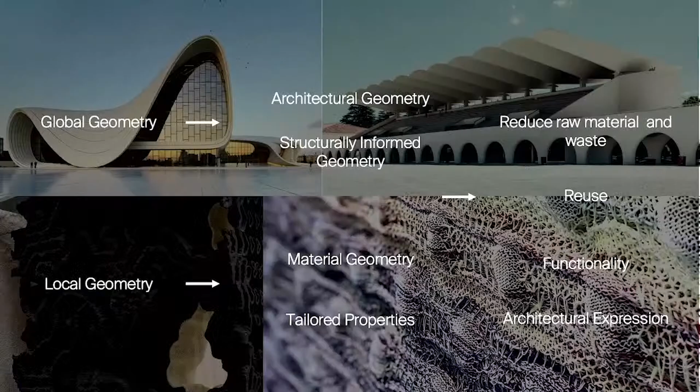More specifically, if I think of those in terms of geometry, we could categorize them into one, the global geometry type of scale, where we think of architectural geometry or structurally informed geometry, and this comes very much from the heritage of having been here in the BRG, as some might think I still am. They are not mutually exclusive, and sometimes they actually work quite well together.

But it's not only always about the global geometry, where we talk about these units, but actually also a little bit of a deep dive into local geometry. And that local geometry could very well be understood in terms of material geometry, so specifically where we place that material within a structure, and having those tailored material properties.

So really being able to say, I would like there to be this type of material here, and I would like it to perform this way, or vice versa if the material wants to do that.

What these types of approaches, both at those double scales, can allow us is to look into this reduction of raw material use, reuse, functionality, and architectural expression generally, so that we can go across all of those scales. And if we keep that on one side, what I'm really trying to do most of the time is couple the way we design, build, and usually that's very specific, and fabricate, so that it can enable us to achieve these goals.

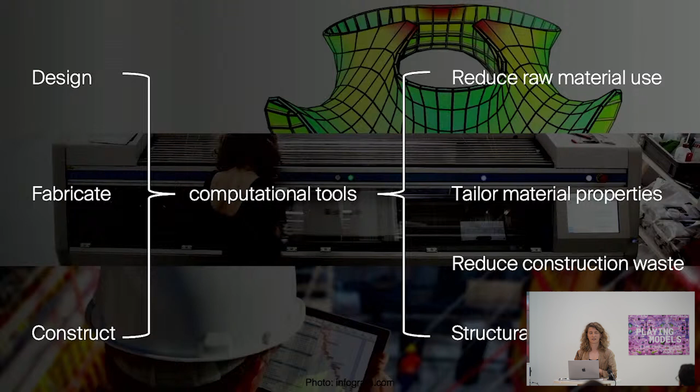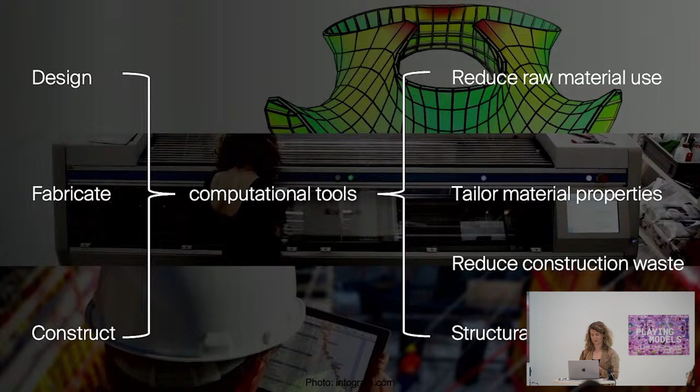And those enablers are actually computational tools. I put fabrication very specifically in between designing and constructing, or designing and building, because most of the work that I do is linked to fabrication, so I would like it to be there explicitly. I don't talk maybe as explicitly about design, but you'll see how that gets informed through these.

To get quite to the point in the deep dive, in that sense, I really work on how we could do better with the materials that we have, so that we use less materials.

In the PhD that was developed within this building, I looked at how we could build complex concrete structures in a more effective way, because if we have these kind of concrete structures that are thin, filigree, span large spaces, have doubly curved geometries, and so on, as you might see in this image, we can reduce that material use, but what we usually have is a problem in how we build them.

This image is by no means a sort of criticism to the master builders, Felix Candela or Pier Luigi Nervi. It's actually kind of an homage to say that these people at that time were also looking into material efficiency and how we might rationalize geometry and build that and come up with systems to build. So if anything, it's taking inspiration from that, and trying to translate it to the modern day.

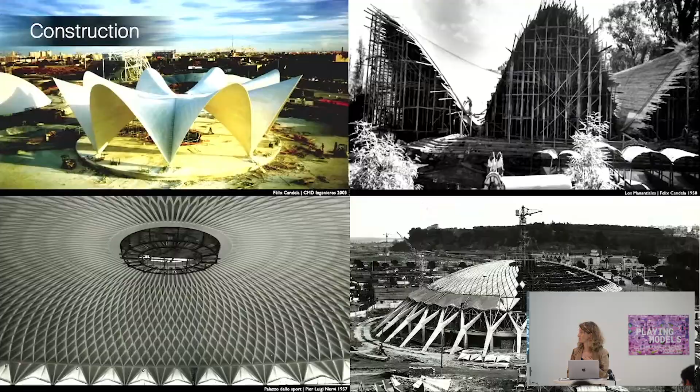In that context, the system that I usually talk about is a lightweight formwork system made with knitted textiles specifically. Now, textiles are used for formwork more often, and they have been explored throughout the past 100 years or so. What's special about what I do is the knitting side of things in that sense.

The reasoning behind that is that they're fast to produce. They can allow us to reduce this waste and be used with minimal intrusion. I'll give you a few examples of that throughout the presentation.

The idea behind it is that somehow if we move away from a traditional formwork system, so one that we're used to where you have timber forms or milled EPS forms or whatnot, into one that uses a membrane as a forming system, we have an avenue to use less material, both in the structure and in the building thereof.

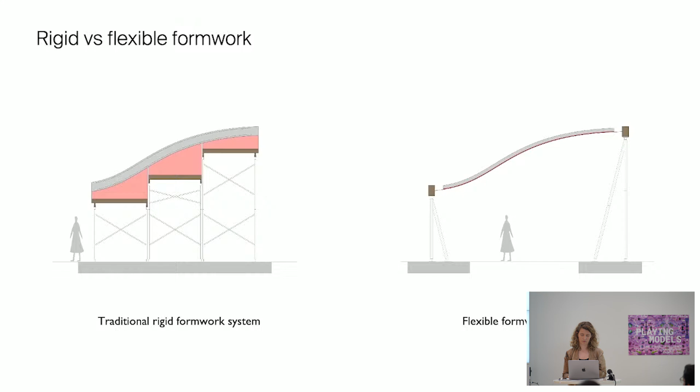How something like this works is we start with a design, hopefully a structurally informed design, one that uses less material.

For that design, you produce a fitting knitted textile using existing machines, so it's a robot of a different sort. That textile is then taken to site and tensioned into a rig, and that tensioning can be done in any number of ways. You could do this with an exterior frame, as you see here, with cables, with splines.

With inflatables, however you see fit, or however the structure deems fit, and then it's coated with a thin coating that gives it an initial rigidity to make the formwork. This step is quite important because for all of their advantages, knitted textiles are very soft. So if you were to attempt casting anything into them, they'll deform quite drastically, and that doesn't really bode well with us wanting to get the structure that we want out of it. So keep that in mind.

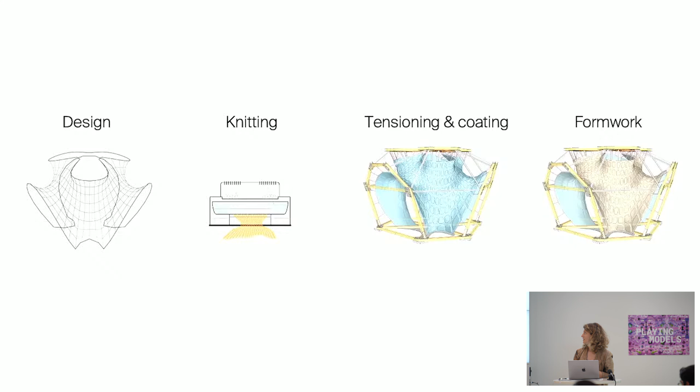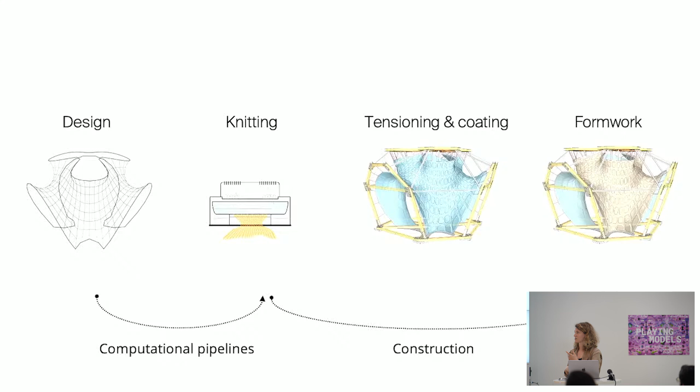There are two challenges in this. The first challenge is, if we do have a design, how do we get to the fabricated textile for it? Those can be addressed through computational pipelines. The second challenge is, if we do have that textile somehow magically fabricated - and it's not so magical actually, you'll see - how do we use it to construct things, to build things? Throughout the examples I'm giving you today, I'd like to show those two processes, starting first with the construction side of things, very briefly, very fast.

The first time we tested this out at the large scale was during the Knit Candela project in 2018. We give these names to projects because they're very much homages to the famous shell builders in question - in this case, Felix Candela - where we reinterpreted that geometry of the hypar into one that is fully doubly curved and explored how that concrete structure could be built using a textile.

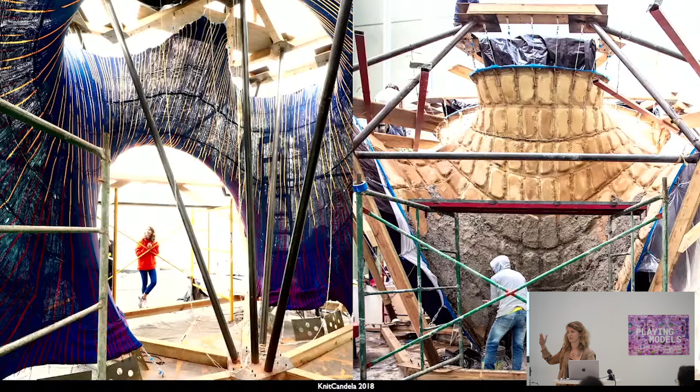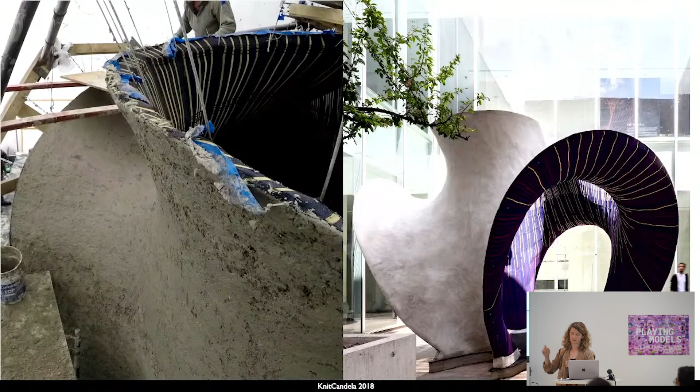What you'll see - I'm not going into details about it, it's a project I've shown a couple of times and I hope it is one to show how the system works - is that kind of textile that gets manufactured is tensioned in a rig. It's coated with a cement paste coating on one side, and then concrete is applied in a rather traditional, manual way, as you can see in that image. At the end of it, when the concrete hardens, you can take away the frame.

You end up with a structure that looks a little bit like this, that has this play between the hard concrete exterior and the soft textile interior. And that's just a video of it in that sense.

Why this project is particularly important, or a pivotal point, is because it looks at the construction of the concrete side of things - how we can have such a lightweight system carry a heavy concrete load, or whatever other molding material you might want to mold. And on the other hand, because it actually really looks at how we might scale those textiles and have them very specific for the purpose that we need.

Some of the takeaways are that the textile formwork, the 50 square meters including cables that were needed, but excluding the outer frame, cost about 2,500 euros - or 2,500 dollars, whatever translates. They weighed about 25 kilos, and the cable net weighed another 30, so in the end, 55 kilos carried 5 tons of concrete.

Here is where it gets really interesting, at least for now: it took 36 hours of machining time to produce those 50 square meters of doubly curved surfaces, and it would usually take about 750 hours to mill 50 square meters of a comparable doubly curved surface. It took 14 weeks from design to the structure standing there, and that says something about the kind of activity that can be achieved if we have the types of systems that enable that.

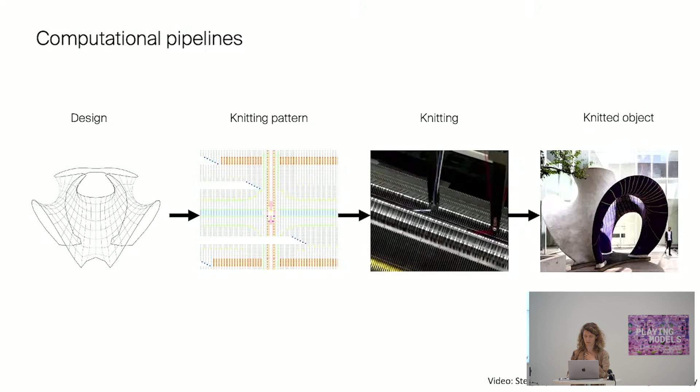Now, if we want to do this at a larger scale, what we need are these kinds of computational pipelines that translate that design into an instruction for the machine automatically. That's what enabled this kind of project, or the 2 years of development beforehand.

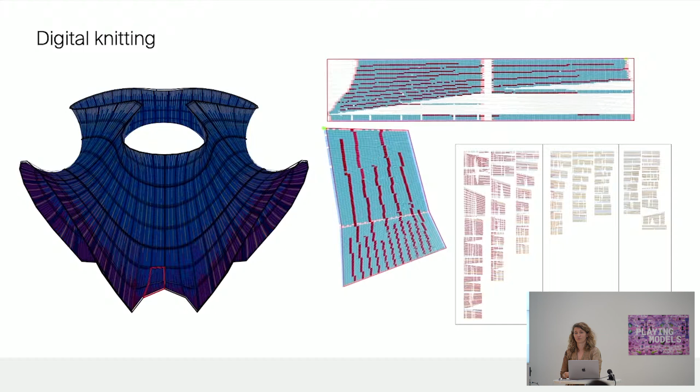What this really does is a 3D remeshing of the object or geometry we want, into a topology that can then be represented as a 2D grid. That 2D grid can be represented as a pixel grid that can then be given to the machine. So there's this direct relationship between a 3D object and a 2D representation of that object, meaning you actually produce something 2D that is 3D.

That's what the machine looks like in general. It's kind of just a plotter that goes line by line and adds material where you've told it to add material.

I'm showing it because these types of developments are not only interesting for us, but for machine manufacturers as well, specifically because it gives them an entry into a different field or sector they're not actually active in. So it's nice when you also make other manufacturers happy.

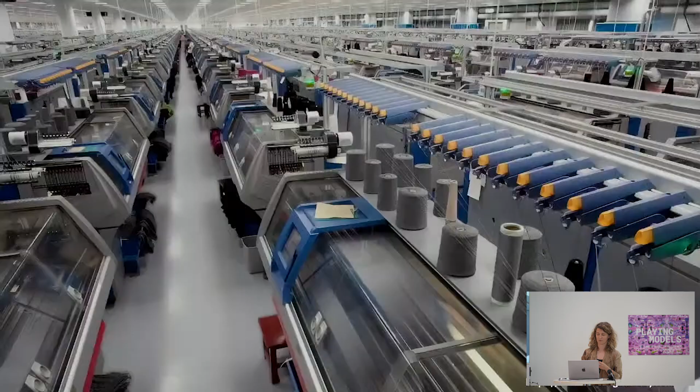Most of the time it's not only about making them happy. Though we show these kinds of machines in isolation, because in a research context it's usually just one, the truth is there are many machines like this all over the world. There are hundreds in factories churning away socks or whatever else they're doing for us. So if we can make those types of instructions, we can send them very lightly wherever and have things produced locally very easily, tapping into this type of power of production that already exists there.

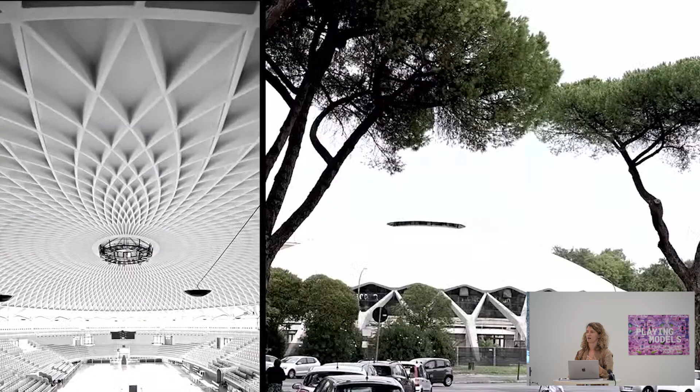The next project I wanted to show you was one we finished in 2022. It started out as just an ETH project, then I moved to Delft and it turned into a cross-country collaboration. Let's say it's an evolution of the first one that looks again into the formwork system itself, but also into how we might bring it closer to something that industry might understand as implementable a little sooner.

In this case, as the name suggests, it was called Knit Nervi, inspired by Pierluigi Nervi and the Palazzetto dello Sport. The pavilion was built at the Maxxi Museum in Rome, just a couple hundred meters down the street. What you'll see here is this kind of diagrid of ribs, a ribbed shell structure, that isn't always easy to build, so we looked into how this might be built.

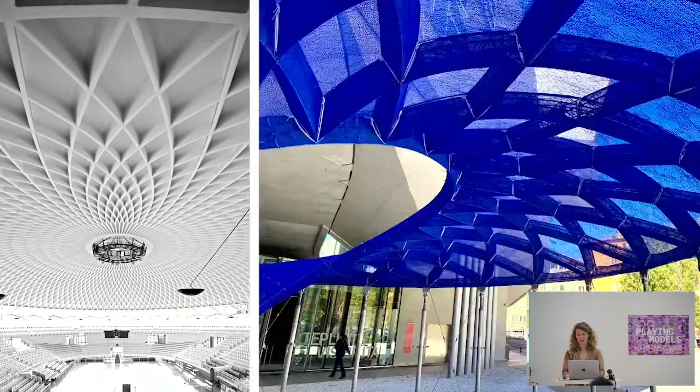You'll see that interpretation of this geometry in the funnel shell shown here. And because, of course, we had Lotte working on it—Lotte is a PhD student still at the BRG, but comes from Stuttgart—you might see this nice little droplet that's evocative of these kinds of Frei Otto geometries as well.

What you'll see here in the geometries that we try to make this kind of diagrid structure, it looks a little bit more recognizable probably to industry, and it includes reinforcement. This is what it looks like from above in the end, so you'll see the kind of diagrid. It looks small, mostly because in any photo that we take, it's either dwarfed by the museum, that is huge, or it seems somewhere placed alone in space.

The truth is, for context, this is about 2 times the size of the previous structure I showed you. So this is 9 meters in diameter and 120 square meters of textile, right? So we have an order of magnitude of scale in that sense. This type of process also started with a form-finding exercise in the beginning, to get to the geometry of the shell.

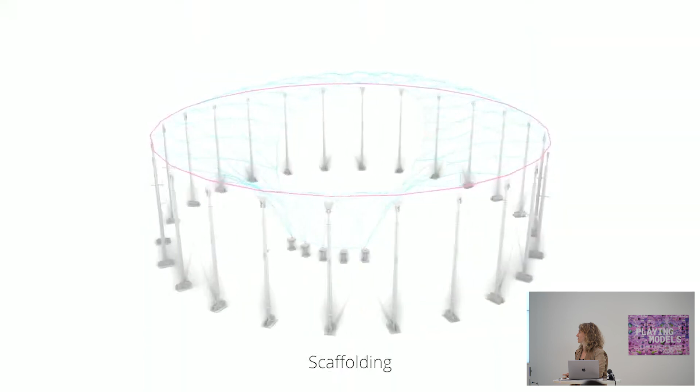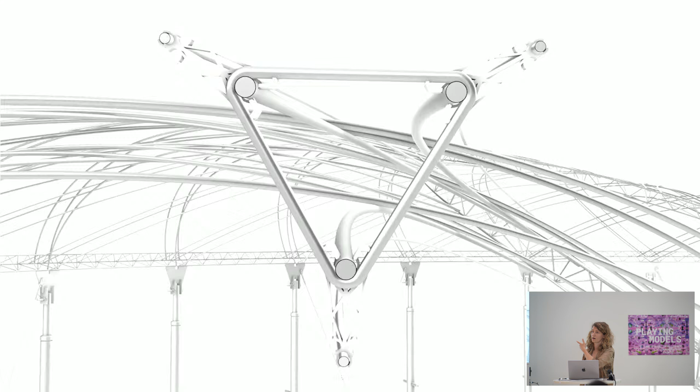You'll see how this is reinterpreted by moving the supports up and down. In this case, what we also wanted to do is make sure that there is even less waste or support structure that's not used subsequently. So in this case, we took the rebars that would be the rebars in concrete. They're a bending active grid shell, and they would become part of the structure, but they are the ones in this case supporting the textile with some 3D printed nodes from it.

This is what it looks like during construction, just so it gives you a little bit of an idea of how that bending active grid shell looks like as a structure on its own, and how this gets covered with the textile in the end that would become the formwork for concrete.

So if we explode those kind of geometries, it looks a little bit like this. There's some standard scaffolding support, and that's the only part that's not used within the structure eventually, but the standard scaffolding support can be taken away and used anywhere else. So there's really very little waste there.

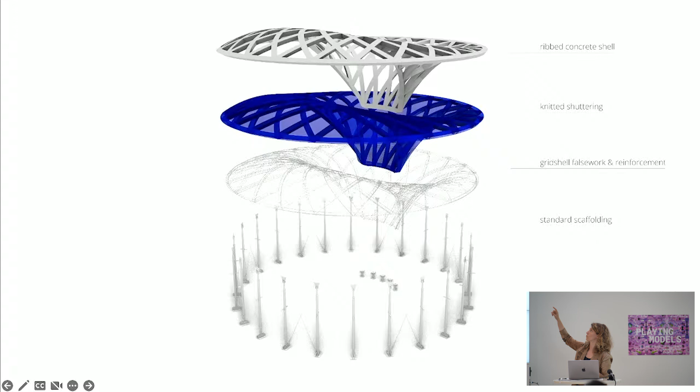There's the grid shell falsework that becomes reinforcement within the structure if it were to be cast, the knitted shuttering, and what would have been the ribbed concrete shell that results from it. Now, full disclosure, if it wasn't clear from the images already, we did not cast this.

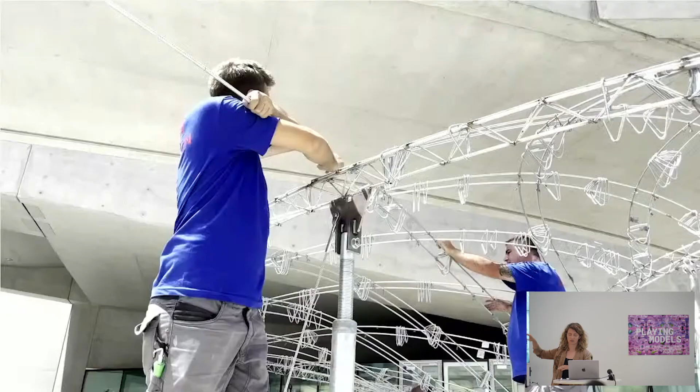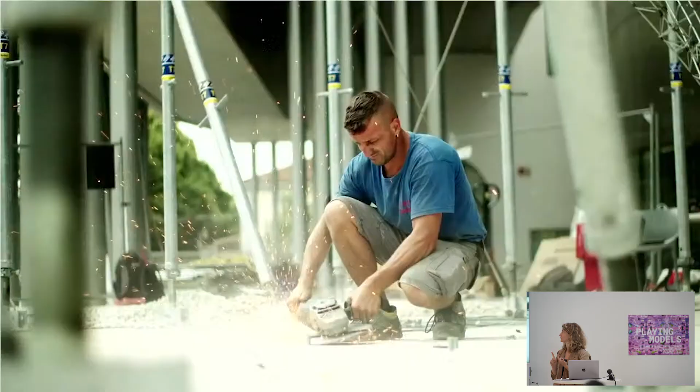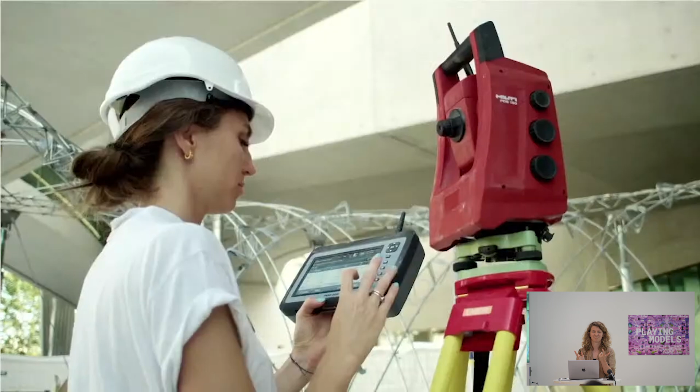There are 2 reasons for that. And while you see how the first part was being built up in rather traditional ways, the reason for not casting that was, for one thing, we did it before, so we could reasonably assume that we've shown that you can use it, although you never do until you do. Secondly, it was a temporary exhibition, so if we were going to make a point about being sustainable about concrete use and then make a structure for 5 months and demolish it, we thought maybe the message is not completely there.

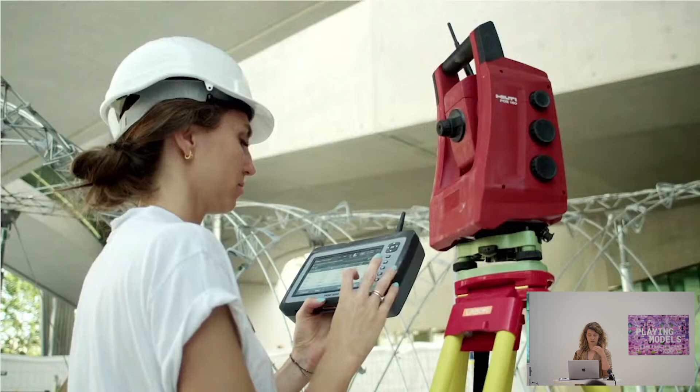But third of all, it was in a museum, and the visitors to the museum were not necessarily people from the construction sector or architecture, so it gave us an opportunity to look at how we might offer the visitors an X-ray through the structure or an understanding of what a structure is built up like in general terms. And think of the whole build-up in a fully deconstructible way, so that it's modular and could be constructed and deconstructed instead of torn down.

What we did is we built first the grid shell. So you'll see it ends up looking like this. We measured everything about it, and then decided to start the production of the textile after the grid shell was built, so that you would create an actual tailored fitting textile for it.

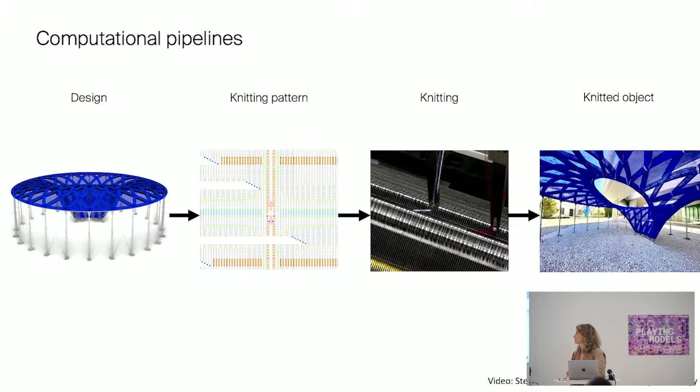Now we're talking about 120 square meters, not 50, so we're looking into a little bit of a different scale in terms of computing power or how you generate these patterns. And we also started looking into how we might address very specific material properties locally. Until now I've been talking about the global geometry of it, but in this project, local geometry starts playing a role in the same way through a very specific tailored materiality locally.

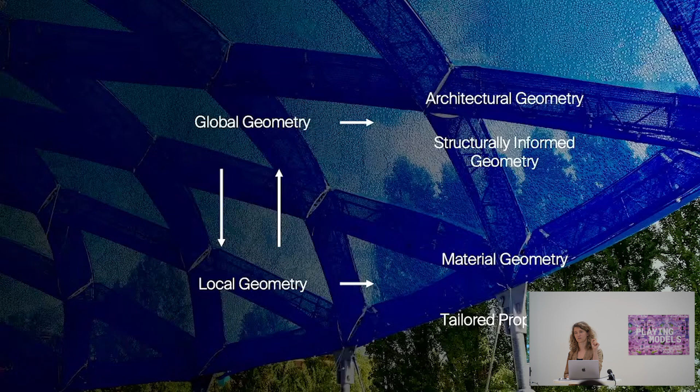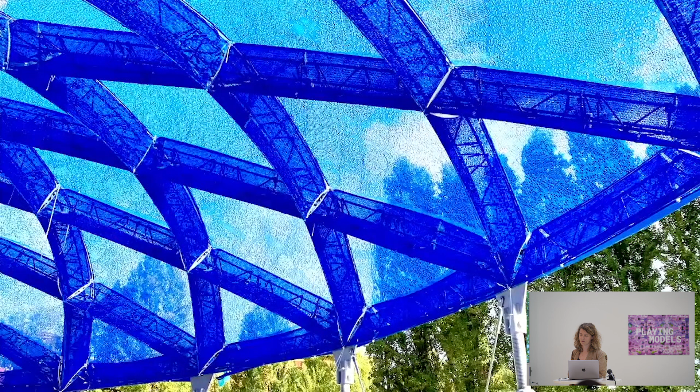So what you'll see in the transparencies—and this will come, they're a little bit difficult to photograph—is that in the transparent parts between the diagrid, there's a gradient for each one. You have graded material properties that are fully controlled during fabrication, but also fully controlled during that generation process. To do this means you need to generate your patterns or pixels in a very precise manner, otherwise it becomes a lot more difficult to control.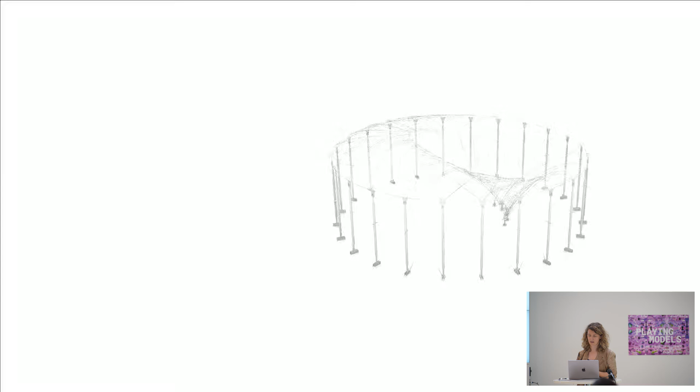So in terms of computational pipelines, that meant a development. In this case, we didn't have just 4 pieces as in the previous one, but actually 72 pieces that needed to be made, so you need to generate quite a lot of data and make sure you can control that. Just to give you a quick idea, we started with a density distribution for how we wanted the material to be.

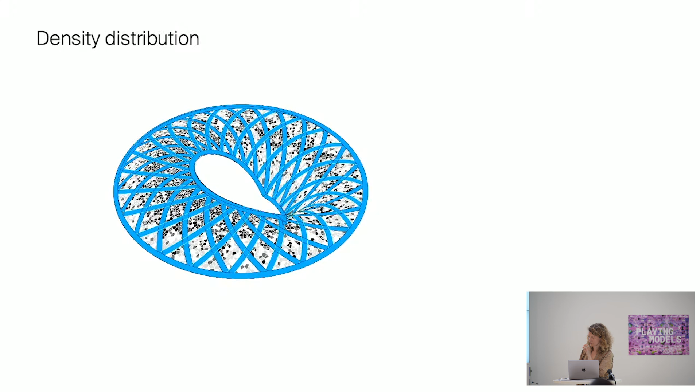The diagrid itself doesn't have density variation because that represents the concrete. For each one of those pieces, it would generate that 3D topology of points that represents a 2D grid. In this case, it's about 30,000 generated points to get to one of these. Each one understands its relationship to the structure in space, and understands what it's supposed to be as a function in the final piece.

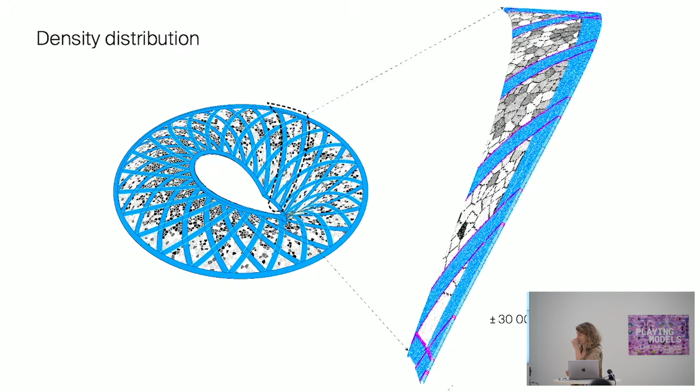For example, the magenta bits know they need to be a channel, and the others know they need to have a particular density. The 2D representation would look something like this, but there's another catch: this type of grid means each pixel is actually a 4x4 grid, so it needs post-processing to transform those into actual instructions for the machine. They were generated on a 4x4 grid instead of very specifically on a 2mm by 2mm grid.

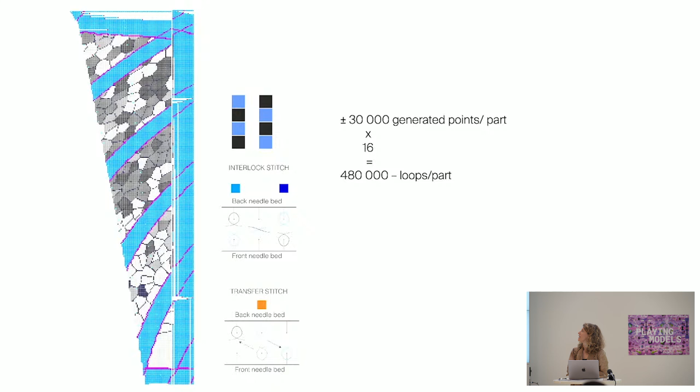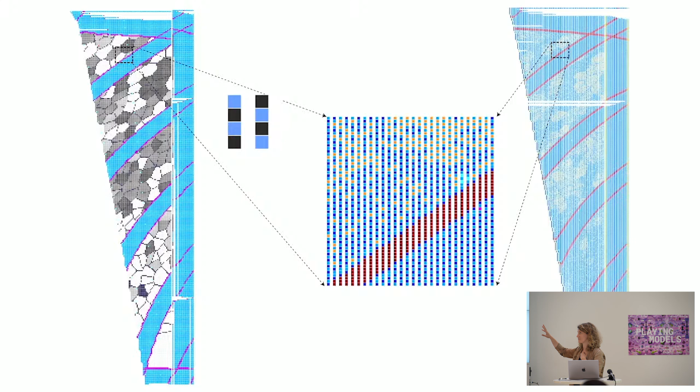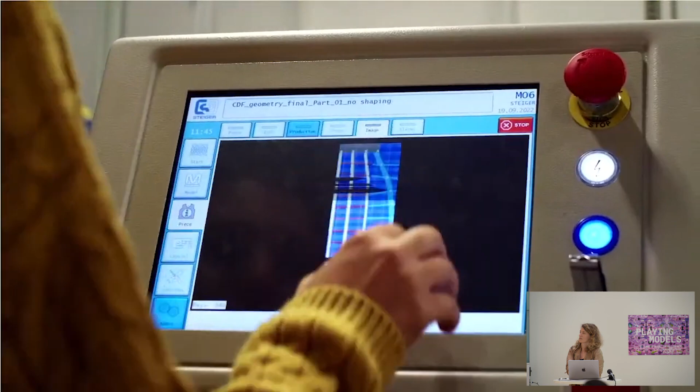That looks a little bit like this. I'll go through it quickly, but it's this kind of post-processing of a pixel into extra pixels that really decides these types of functionality within the final product. After all the different steps, you get an image like this that can actually be fed to the machine to create all the different densities within the final geometry. You'll see again the machine producing these kinds of textiles.

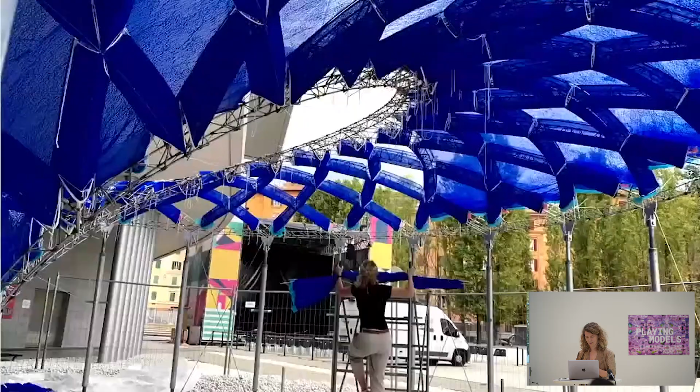You'll see all the pieces, and the classic approach—we put it in one bag and took it to site because it's lightweight and easy to transport. But again, we could just send the instructions. This time around, you don't necessarily need a qualified team of builders to put things up, but rather an unskilled worker who can assemble these things, sometimes taking a little bit more time than they thought. So this is what it ended up looking like in the end.

A few views from the inside, and here I think it's a little bit more clear how you can see these kinds of transparencies or graded material properties that can be done with such pipelines. Again, that project looks at both efficient deployable flexible formworks on one hand, and also graded material properties and the computational fabrication pipelines needed for it. So it's really across different topics at different scales.

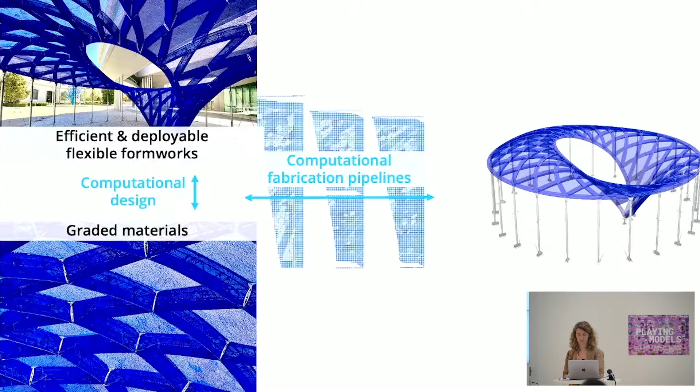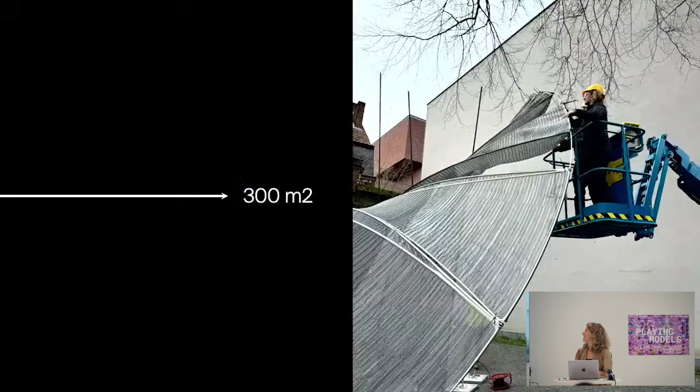If we started with 50 square meters and the second project ended up with 120 square meters—this was 2018, this is 2022—it turns out that roughly every 2 to 3 years, I like to double the amount of textile that we make, and I like to pretend that I'm a construction worker. So this year, we doubled that yet again.

So we went to 300 square meters of textile, and being construction workers, we built a pavilion for Bruges, for the Bruges Triennale. It's called Common Thread. We've done this together with Soil and Summum Engineering. This time it has nothing to do with concrete or things like this—it's purely looking into how we can apply these techniques and how we can scale them up in a few ways.

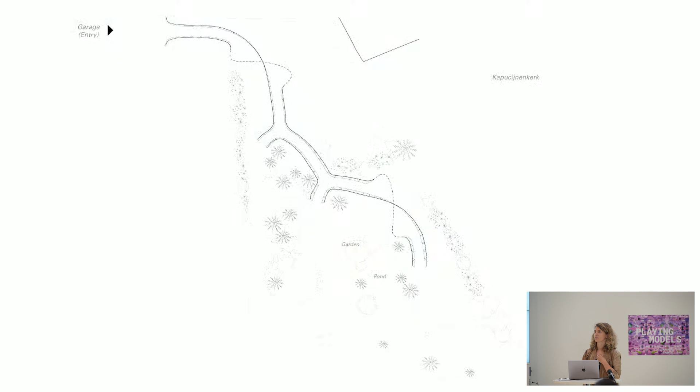For the Triennale, the theme is spaces of possibilities. Since Bruges is kind of seen as an open-air museum, they're looking at spaces that are not usually visited and are not accessed, and how we might bring new life or new use into these spaces.

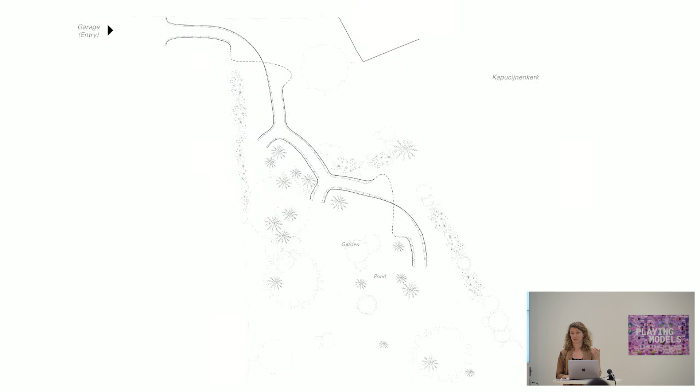It's very difficult to see here, but it's just a structure within a large courtyard that's otherwise never really used, but beautiful. It's inconspicuous, so you get there through a garage door that you may or may not find, and it might just give you this kind of wormhole idea telling you, hey, come in.

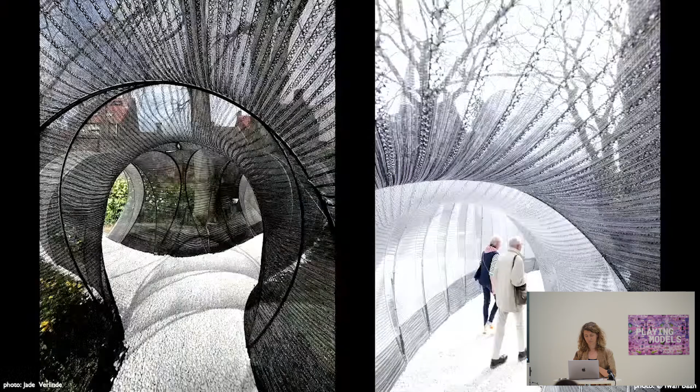And if you do, you go down the rabbit hole through this simple sort of tunnel, but that flips you inside out in moments and creates this kind of space within the courtyard, trying to thread a connection between outside and inside, and between the past and the future.

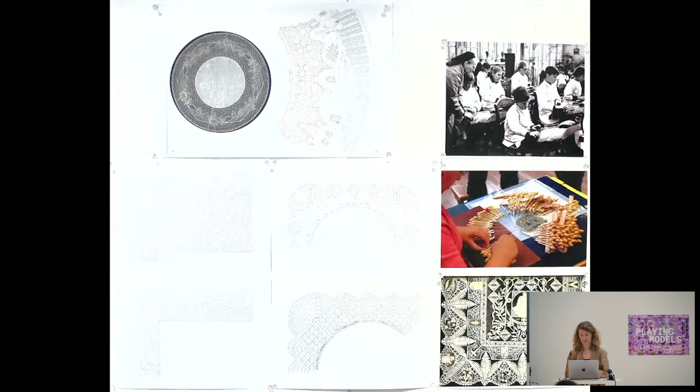Why I'm saying between the past and the future is because Bruges is also known for something rather computational in a physical way: lace making. So the inspiration was in using a textile, looking into these lace making techniques and how those translate in the same way to our machines, how we make this digital lace, and how we could transform those techniques.

There's a point of trying to work on those computational tools, this time because I need very specific control over these types of lace that we designed. Everything needed to be generated at a 2x2 pixel grid instead of 4x4, and so on, so it just gets bigger and bigger in terms of computational needs.

Finally, since I called it digital materials across scale, we kept going up and up in scale. The truth is we don't always need to go up and up. I hope that in 3 years I'm not going to be on a scaffold doing the 1,000 square meter pavilion, but rather somebody else might be, and I just design it - that's fine. I'm trying to go back down in scale so we can understand some of these mechanisms a lot better.

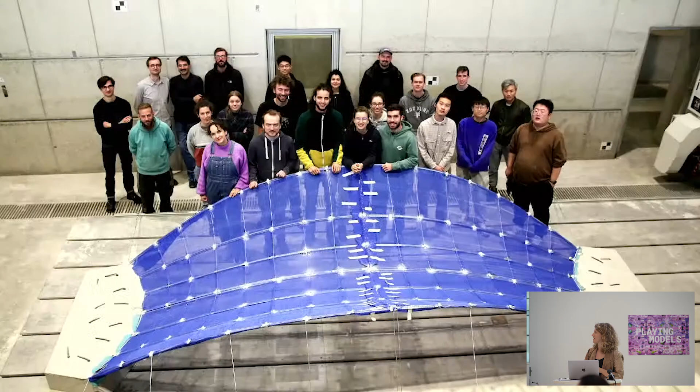It started with a small bridge that you can see at the end of the corridor here. We said, let's scale that up and see how we can automate some of these processes. The textile isn't very special, and if anything, compared to all the other projects, it's the one that went the wrongest, because of the smaller scale, I guess.

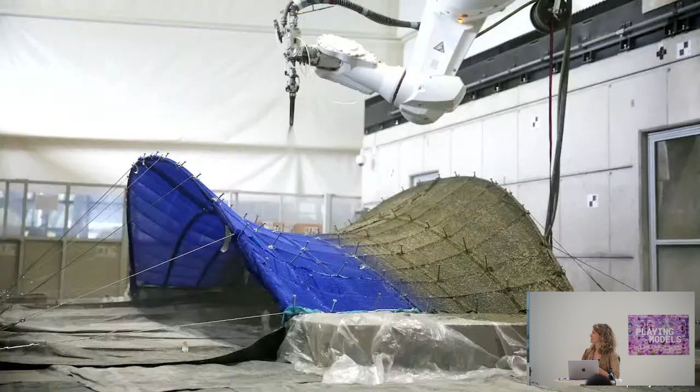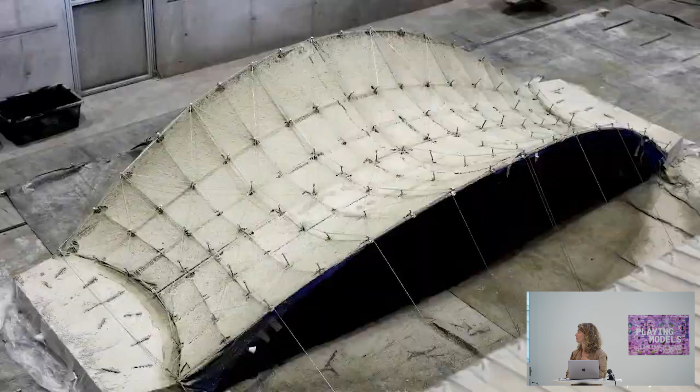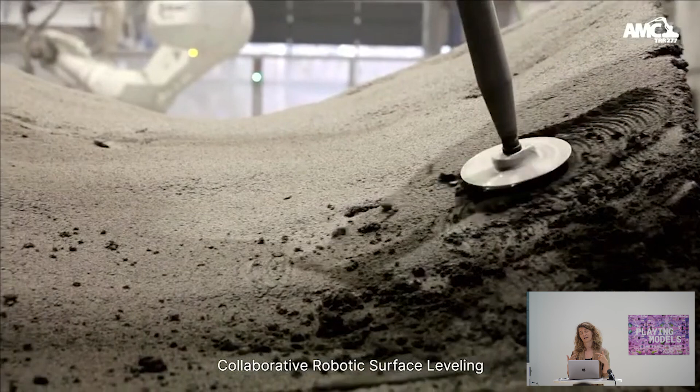We combined that with automated fabrication technologies being developed at the other universities as well. So instead of a manual concreting process, there's automated path planning and robotic fabrication setup to add the first coating and all the other layers on top. It's really trying to solve different parts of the problem in terms of construction and digitalization at different moments in time, at different scales, or in different contexts.

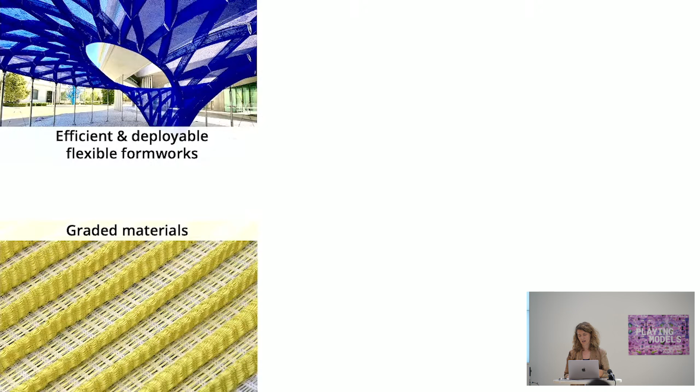So if I were to sum that up, what I'm trying to get at is looking at the structure as a whole: deployable formworks, graded materials on the other hand, mediating these two scales, and how we might have adaptive or hybrid systems - different types of materials or models we can put in there - and how we can address the automated fabrication of it. There are a few hinges in this.

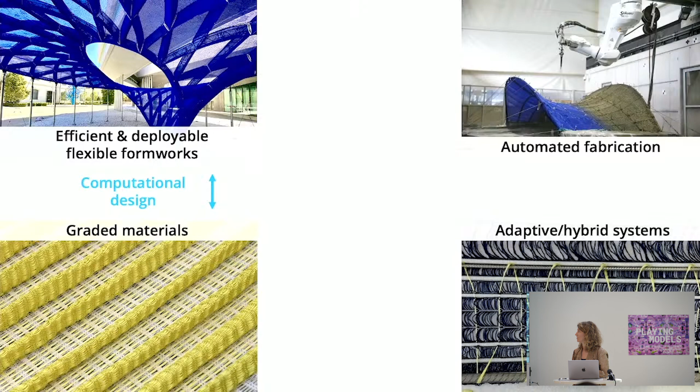First, the computational design approach I've put forward everywhere, so how we design both of those scales. Then how we have those computational fabrication pipelines, so we can get to automated fabrication at whatever scale it is or for whichever part of the structure.

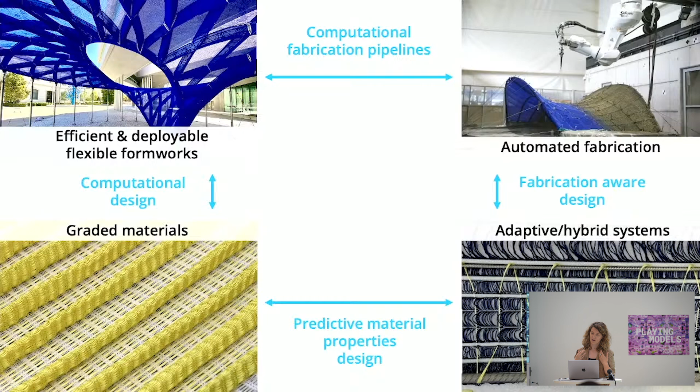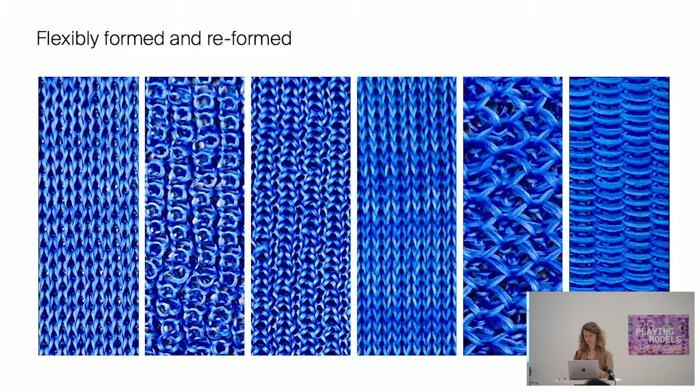In that sense, I'm moving closer now into the more zoomed-in scale. I wanted to give you brief examples of newer work that moves into this scale, looking at the different textures of the material and the local architectures, how they combine and what kind of influence they have. So really zooming into the material.

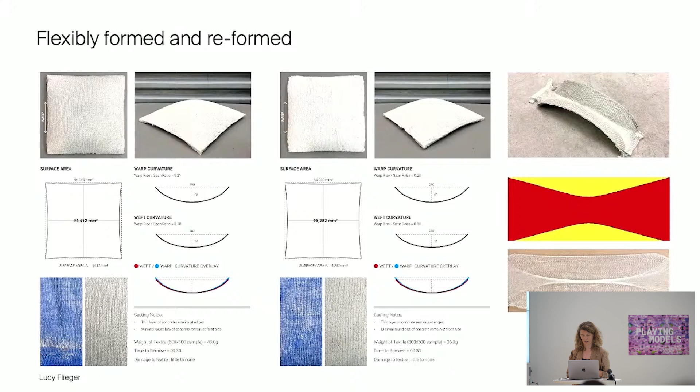How they deform or perform, how different combinations of those materials perform, and how we might start understanding their performance in that sense. In these cases, we don't have a coating, but we're trying to understand how this works with the deformation of loads, and how we might start thinking of these in modular terms.

I'm working with a textile, meaning it's flexible. Now, we try to freeze that flexibility with a coating, but what if we were not to freeze that flexibility? That means we might have an opportunity for reconfiguration, reuse, and modularity within it, because you could get different geometries from the same piece, and different behaviors from the same kind of material grading within. That's really difficult to understand at the moment, and that's what pushes me to go there.

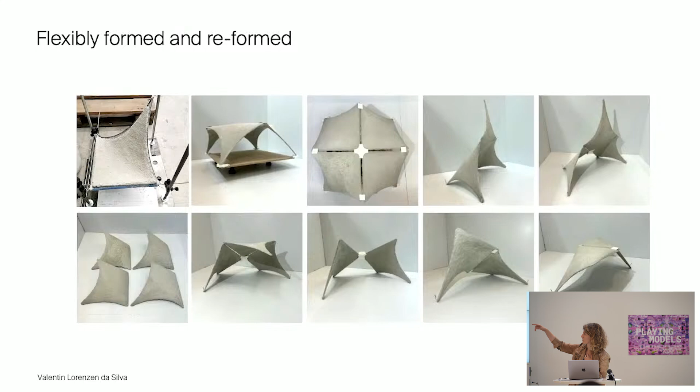So there are just some examples of recent work in that sense. What you'll see here is also this kind of reuse of the same piece over and over again.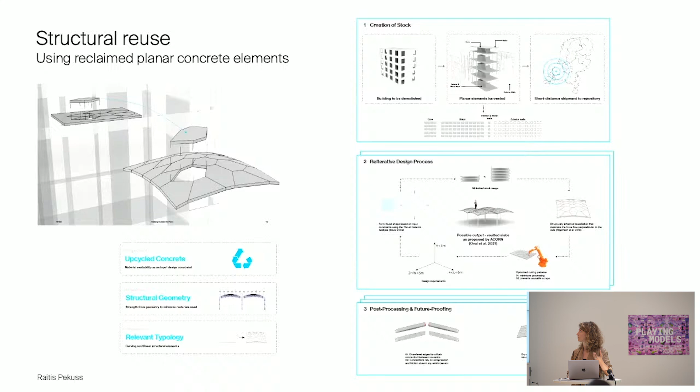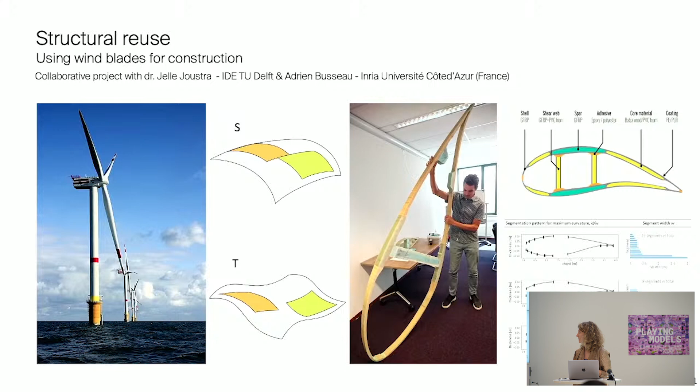I'll skip over the other ones because it ties into a structural reuse part of things, and how we might map an existing domain where we've had a structure into a target domain, the structure we want to build. We're exploring this also with concrete and with wind turbine blades. It's really this kind of mapping of two spaces onto each other, regardless of your source or target space.

So although it might not be immediately clear where all of the AI or machine learning comes in, it's in the pixels, I promise you. So thank you very much.